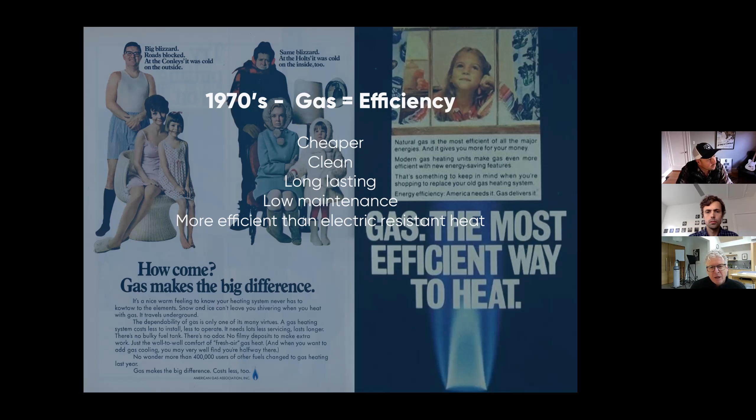So this idea of cheaper, clean, and this notion of the clean blue flame was part of the messaging that started in the 70s, and it's with us to this day, really. This idea of efficient, cheap gas really came on in the 70s, and that idea is still prevalent. In the 90s, we started to get more focused on the efficiency of the appliances. There were things going on in the regulation space, and Energy Star came on to make it really obvious to people which appliances were more efficient than others, so consumers could make good decisions that would affect their cost of operations. And so this idea of really high efficiency appliances was the way to be a good environmentalist and also to save yourself money.

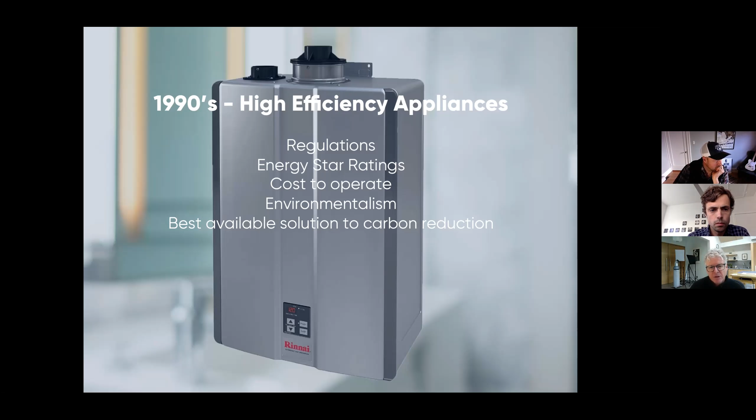This example here of a tankless gas on-demand water heater is kind of the poster child for efficiency. In a lot of people's minds, that's still the benchmark. What we're going to talk about today is how there are new developments that blow this away in terms of efficiency, cost of operations, and carbon emissions. The reason these changes have happened has to do with two really big things in the last 20 years. The first is that electric appliances have gotten dramatically more efficient. When I say dramatic, we're talking about 3 to as much as 10 times more efficient than the appliances we'd been used to.

The LED light bulb is kind of the poster child for this; it's over 10 times more efficient than an incandescent bulb because it doesn't waste energy in heat. While we're mostly going to be talking about HVAC and water heating, which absorb way more energy than lighting, lighting went through this dramatic transformation and many other things did as well. At the same time, the electric grid is getting way cleaner, because coal-fired energy generation has diminished. A lot of coal plants are being retired. In fact, just last week, we got news that Boardman closed here in Oregon, which is fantastic.

We should have a party to celebrate. That means there's no coal-fired generation in Oregon any longer. They retired that plant ahead of schedule in order to meet their promises on cleaning up the grid. And this is happening all over the country.

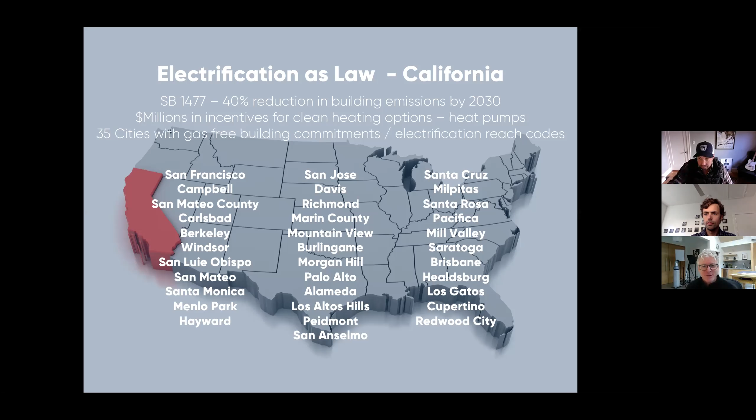But the other interesting thing, more from a grassroots level, from the ground up, there's now 35 cities that have all enacted some form of a gas-free building commitment for new construction, or an electrification reach code, which is basically promoting the idea of building all electric new construction and making it almost impossible to build new construction with natural gas as the primary power source for heat. This is happening really fast. When we started this presentation, I think it was 34 cities, and it's now 35. Really exciting.

In Washington, there's similar things going on. There's two really important pieces of legislation that were passed in the last year that establish energy performance standards for commercial buildings. They require more stringent requirements for either the envelope to be more heavily insulated, or the appliances to be more high efficiency in terms of their point system. And they're really providing incentives for lower energy use and urging people to get off of natural gas.

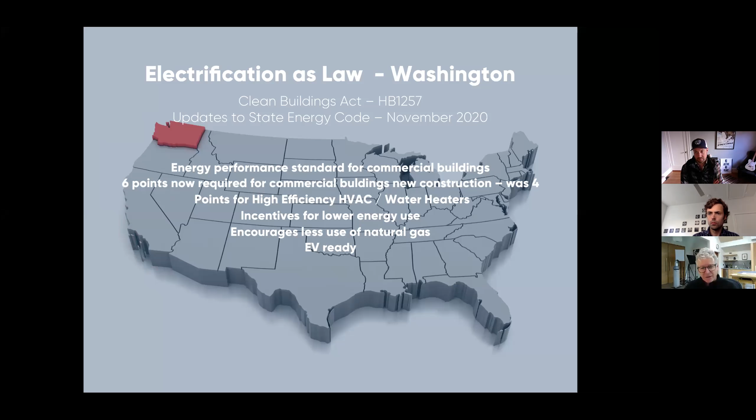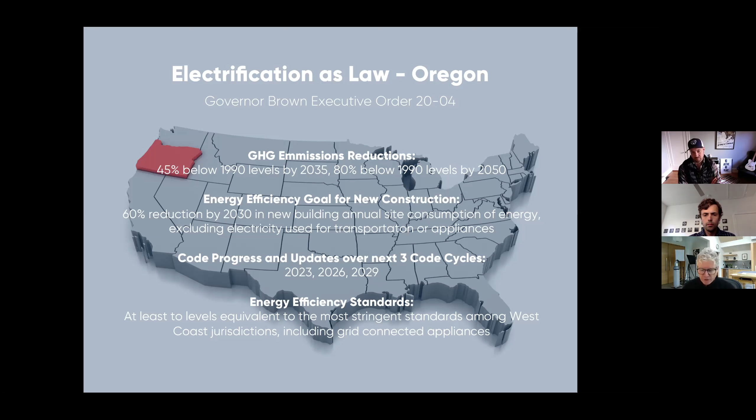In Oregon, there's some really exciting things that have yet to take shape, but with the executive order from Governor Brown, she set these dramatic levels for overall carbon reduction, 45% by 2035 and 80% by 2050. But she also called out some specific energy efficiency goals for new buildings, a 60% reduction by 2030. And basically, if you imagine how you're going to get a 60% reduction, there's almost no way to do it without some of these technologies that we're going to be talking about today. And the code that's underway now will go through 3 code cycles over the next 10 years that will reinforce those goals.

So that's kind of the background in terms of the trends in energy and the legislation that's pushing everything towards all electric homes. But there's also other really good reasons to do that have nothing to do with legislation.

Exactly. And we gave this presentation at HBA last week, Home Builders Alliance, at their Build Right conference. In front of a builders crowd, we were saying that going all electric gets you ahead of the curve. We see this legislation that's in the pipeline or already here, encouraging or mandating all electric homes and buildings. So getting ahead of the curve as a builder is a great idea. Even as a homeowner it's a great idea, because as we see in California, this can happen quickly. But in this section of the presentation, we want to profile some of the great reasons to go electric beyond the mandating and the overall trends.

So the first one is sustainability, and we've talked a little bit about that. It's the lowest cost method for building decarbonization. There are studies out there, and there's a whole buffet of choices we can make to decarbonize our buildings and our lives, and electrification is proven to be the lowest cost and most readily available solution to decarbonizing buildings. The reason for that is that space and water heating are some of our largest carbon emissions from the average home. And you're going to get a 50% reduction by going to some of this efficient electrification.

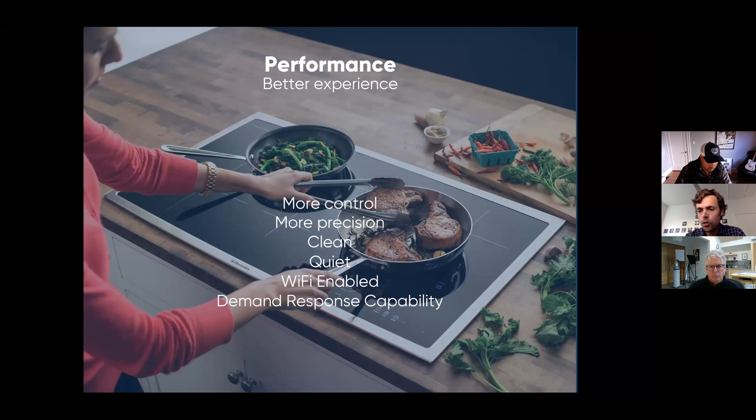And then our final benefit to an all-electric home that we want to highlight is a couple points on cost. First of all, there's cost of installation. Usually, we're finding the sticker prices for all-electric technologies that we'll profile in just a second are a little bit higher than some of their gas and old electric counterparts. But those prices are coming down, which is amazing.

We're seeing some heat pump water heaters that, with installation costs included, are lower than the average gas water heater. We're seeing induction stoves come in for under $1,000, so that's exciting. But usually, on average, the sticker price is higher. But when you consider the cost for building gas infrastructure, piping it to your house, putting the gas infrastructure in your house, studies say that a builder usually saves about $6,400 by not putting in that gas infrastructure. So there's less cost on just installation.

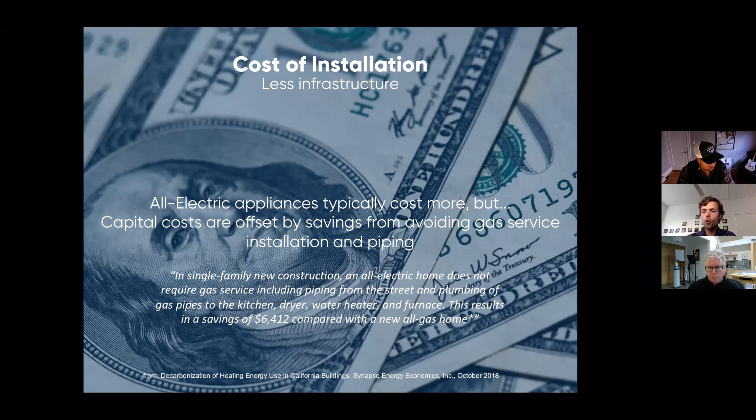And then there's also, of course, less cost on operation. These heat pumps, as we'll profile in a second, are 3 to 5 times more efficient than gas and old electric resistance. And so you're going to save a really good amount of money. We'll show you exactly what that looks like.

And then one other savings is that when you're not connected to the gas line, you save on the gas connection fee. This is a huge moneymaker for gas companies, just having all the people connected to their systems and charging that fee. That's usually $12 to $13 a month. So it's a couple $100 a year, but that can be really valuable for all of us, including those with lower incomes. So lots of potential for savings from being all electric.

Joyce, I noticed there's a question in the chat here about the cost effects of going all electric on low income communities. And it's a good question. We won't go deep on it here, but a couple things. One, there's some really interesting things going on around rate class differentiation, so that we don't get in a situation where more affluent people electrify and leave behind low income communities to get higher and higher gas bills. So there's work going on around that in Oregon, which is really exciting.

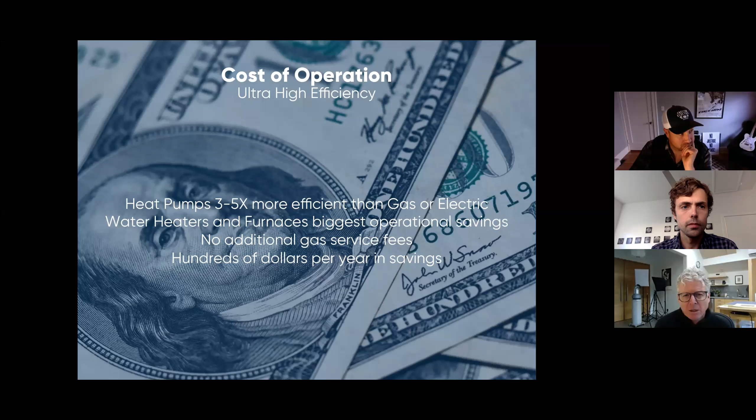But also, I think it's a good point that these are capital intensive changes. Once you get on the other side of them, as Joe pointed out, there's a lot of operational savings to be had, but those are difficult transitions for people who have lower access to capital. Low income communities are a good example of that. And it's why we need good incentives and good policy to make this happen for everybody. We're not going to talk a lot about that today, but we are going to touch on that more deeply in a webinar that we're doing next week.

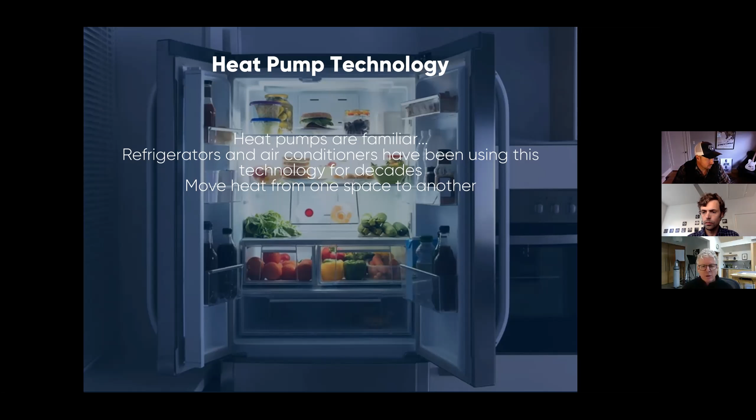And so let's talk first about water heaters, because when I retired from Nike a few years ago and decided to go into this, I was a sustainability professional, that was my job, and I didn't even know that these things existed. And they've been around for over 10 years, but in the last probably 5 years they've really started to become readily available and more of a thing, in terms of who's making them, how available they are, and how well they're working.

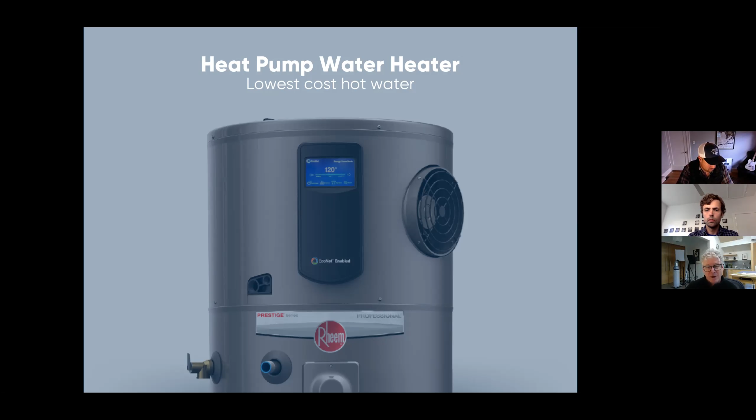So let's talk about how they work. Basically, they're a tank like any other. They're roughly the same size, but what they have on top is this evaporator and compressor unit. That's the heat pump part. And then below it, there's a tank that holds the water with a coil around it, just like any other tank, where that coil is heating the water inside the receptacle.

So what the heat pump is doing is it's blowing air across these coils inside that top area, and it's essentially sucking the heat out of that air and concentrating it into what's called the refrigerant, that fluid that is in the pipes that goes down around the water chamber. So the space that this is in gets slightly cooler, and it concentrates that heat into the tank.

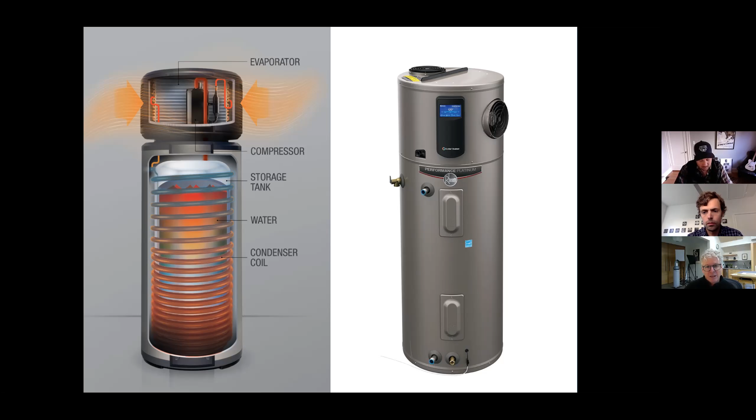And they're incredibly efficient. A good way of thinking about efficiency is in terms of the cost it takes to operate them. So we've done this calculation to show how many hot showers you can get for $10 worth of fuel with these 4 different technologies. And we're talking about a 10-minute shower here. For some of you that may seem crazy, but if any of you have teenagers, you'll know that 10 minutes is nothing for a hot shower.

So we'll say for an electric resistance hot water heater, you're going to get three hot showers for $10 worth of electricity. Natural gas is better. I mean, if you have a typical gas-fired water tank, you're getting 5 to maybe 6 if you've got a really high efficiency one. Tankless is slightly better. You'll get more like 6 or 7 for $10, but a heat pump blows these away. You're going to get 10 or maybe more with electric heat pump because they're so energy efficient.

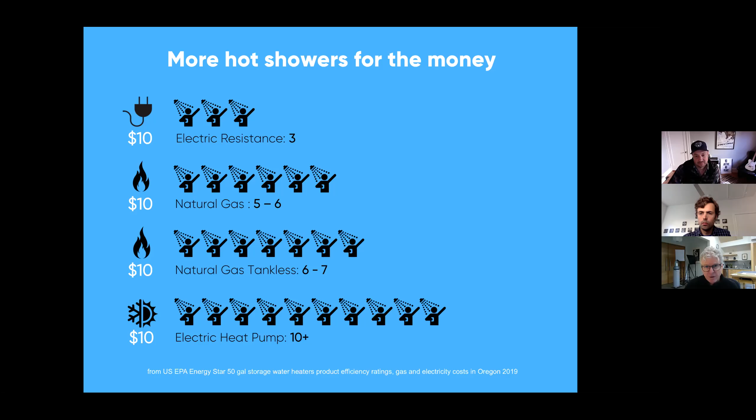What we've got is the best case electric resistance, which I would highly recommend you don't do, which is going to cost you over $400 a year to operate. A typical gas one will be more like $200 to $300. And then if you get a really efficient gas water heater, which almost nobody is doing because they're insanely expensive, that'll lower your cost to about $200. The tankless that we mentioned are also expensive, but not as bad. They're getting lower cost. They're not outrageous. That will be quite a bit lower, about $190.

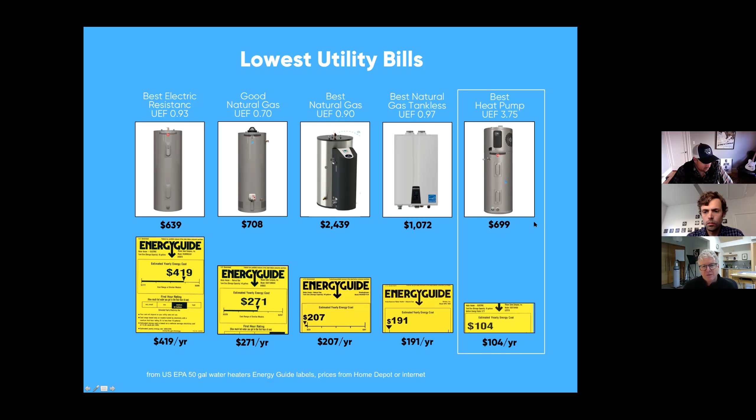But again, if you go for the best heat pump that's available, or even a good heat pump, you're going to be in the low hundreds for operating costs. And the price on these has come down dramatically so that they're starting to be one of the cheaper options that are even available, partly due to incentives and partly due to just more of them being sold.

If you look at the carbon emissions from these 5 different options, however, the heat pump blows the competition away. I mean, it's a fraction of even the best natural gas solution. And as Joe mentioned earlier, if you sign up for renewable energy from your utility, or if you have solar on your roof, this can go to 0 carbon emissions, which you will never be able to do with anything that's gas fired.

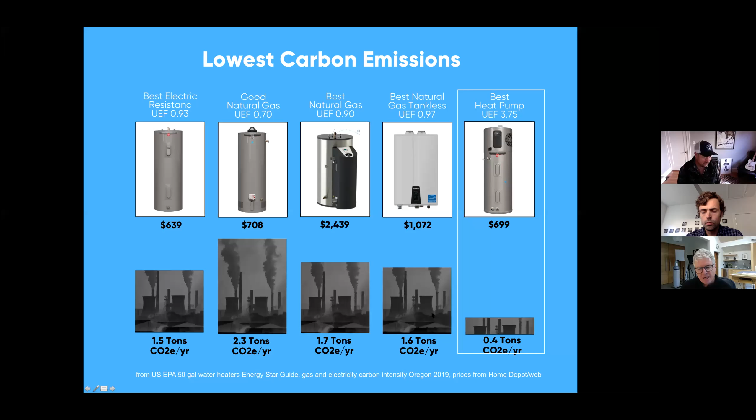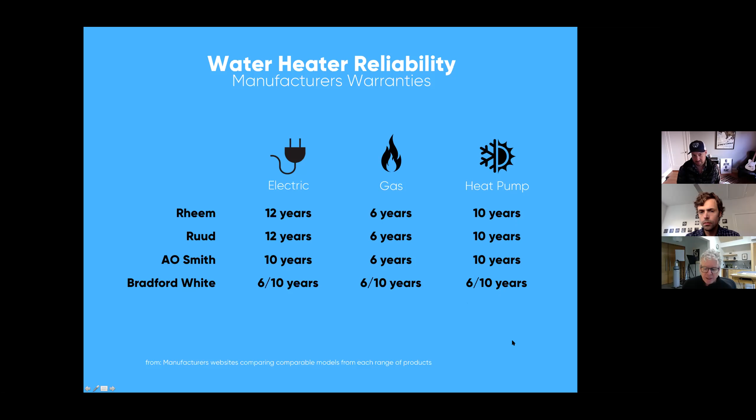So in terms of reliability, I think the best information we have on this comes from the manufacturers themselves, and it's reflected in the warranties that they give, which gives you an idea of the confidence they have in the technology. The electric resistance technology is the simplest technology. It's been around for decades and decades, and so the warranties tend to be longest there. Gas is also pretty simple technology, but you'll see about half the amount of time that the manufacturer will give you for a warranty, and heat pumps are in between, longer than gas, but a little shorter than the electric one. So I think this is a good reflection on the confidence that the manufacturers have in the reliability of the technology.

It's important to know that there are some things you need to know when you install these in terms of where they can go. They are best in an unconditioned space because they're cooling the space. So you don't want it in your living room or something like that, obviously, because it's going to cool down your living room. If you have a utility room that's large enough, if it's over about 700 cubic feet of space, that will work. Garages are perfect. We have ours in our basement, which is fantastic. It dehumidifies the space, so it dries out your basement if you've got a slightly damp basement.

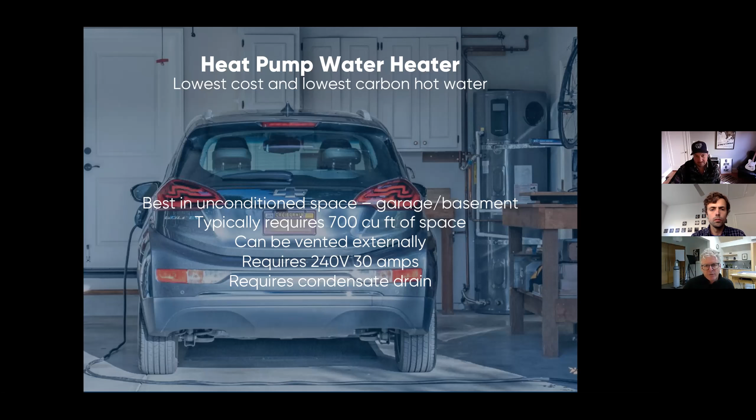It does require 240 volts and 30 amps of current. So in some cases, it means rewiring or putting in a new circuit. And it needs a condensate drain. None of these things are outrageous, but they just are things you need to know if you're putting them into your home. So it's definitely the highest efficiency, lowest cost option, lowest carbon emissions by far.

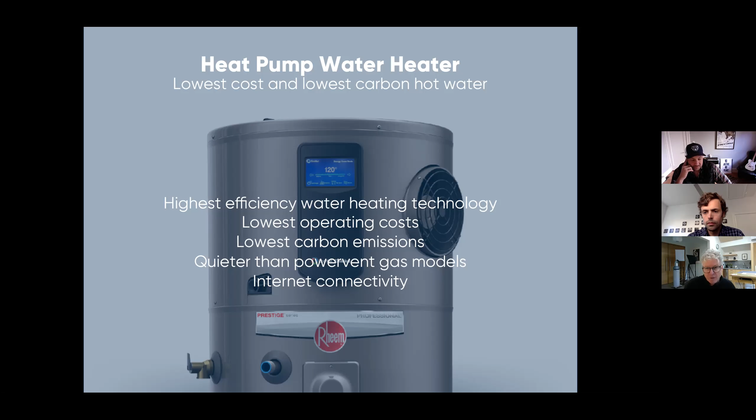They're quiet. They're much quieter. We replaced our power vent gas model with the heat pump, and it's definitely quieter than that. And the internet connectivity is really handy if you're coming and going or want to adjust it while you're away from home.

Okay, let's transition to furnaces and air conditioners. It's the same technology, but here it's applied to keeping your house warm or cooling it. There's a couple different versions of them, and Josh at the end is going to talk about a third option, but basically they all have some form of outside condenser and evaporator unit. It's basically the equivalent to what we just talked about that was on top of the water heater. In this case, it's outside.

So if it's heating your home, it's sucking the warmth from outside and putting it into that refrigerant that's translated into one of these two things on the inside of your house. Either a big thing like an air handler, which is very similar to a furnace that you would have if it was a gas or electric furnace, is connected to your ducting system in your home. And that's going to blow warm air through your home.

Or there's another option of what's called mini splits, these heads that are on the wall. You can have multiples attached to one outside condenser unit. And these do the same thing. They move air through your home. And these are the cheapest and most efficient, and they're amazing. I don't know if you can see them here. I've got one in my studio right up there on the back wall. They're fantastic.

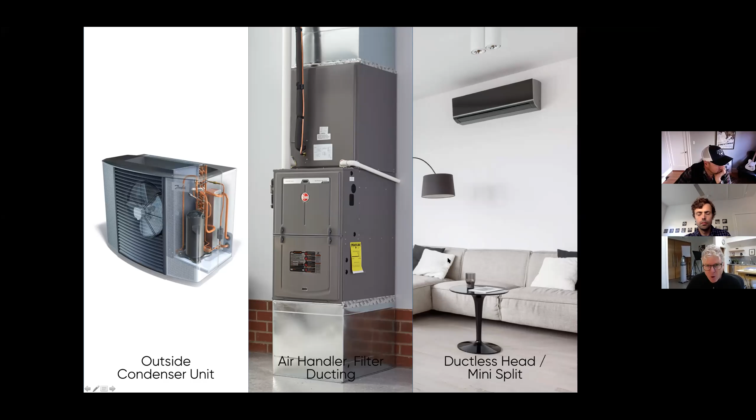Yeah, so all of these options work basically the same way. It depends on how your home is set up. This information comes from NEEA, Northwest Energy Efficiency Alliance, and it's about the cost per 100,000 BTUs of useful heat. And we use the word useful, and it's really important here because we're talking about what you feel. And so you can see electric resistance is, again, the worst option.

If you think here about baseboard heating, any of you who have experienced that know that if you're sitting right next to the baseboard or standing there, you'll feel the heat. But if you're in the middle of the room, you might not notice it, which is why you have to crank those things in order to get your room comfortable, which is why it takes so much money to heat.

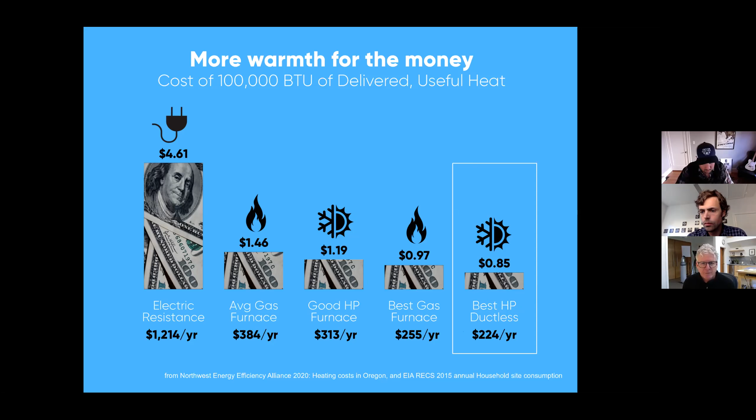Average gas furnace can be dramatically cheaper. A good heat pump is going to be cheaper than that. The very best high efficiency gas furnaces will be somewhat cheaper. And then again, ductless heat pumps are the cheapest. So the way I think of it is a good heat pump solution, whether it's ductless or ducted, is going to be at least cost equivalent to what you're going to get from gas heating.

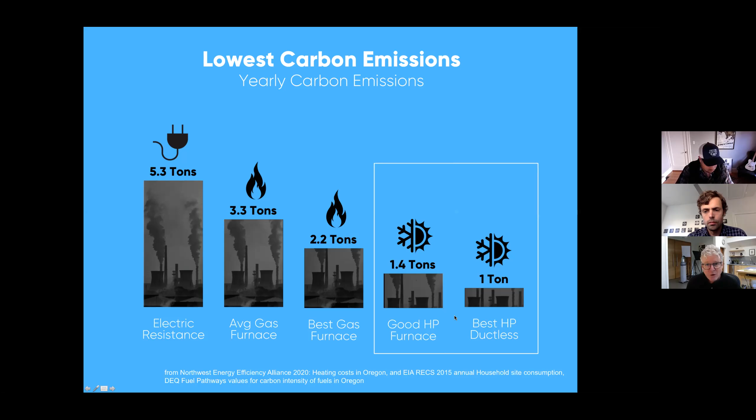But when it comes to carbon emissions, again, the heat pumps blow the competition away. You're going to be half or less what you can get from even the best gas furnaces that are out there. And again, if you fire this with renewable energy, these emissions here will go to zero, which is, again, not possible any other way.

This is some really good information from Consumer Reports. They did surveys with literally tens of thousands of their members to get feedback on their experiences with gas and with heat pump furnaces and air conditioners. And by the way, I forgot to mention, one of the things that's amazing about a heat pump is it's giving you heat, but also air conditioning with exactly the same equipment, which we'll talk a bit more about later. But that's something your furnace can't do. Your gas furnace is going to heat, and you're going to have a separate system to cool your home. So here you get it all in one system.

But the expected life, and keep in mind, this is looking backwards. Some of the systems they were getting information on are 20 years old or more. So things have gotten better since then, but nonetheless, I think this is good information about what you can expect: around 15 years of useful life. I've seen much higher than that, but I think that's a good number to think of. A little bit less than a gas system, but competitive, and roughly the same in terms of when you might need to repair it, and roughly the same amount of money that you might need to spend in order to repair it. The warranties are very similar in terms of their duration.

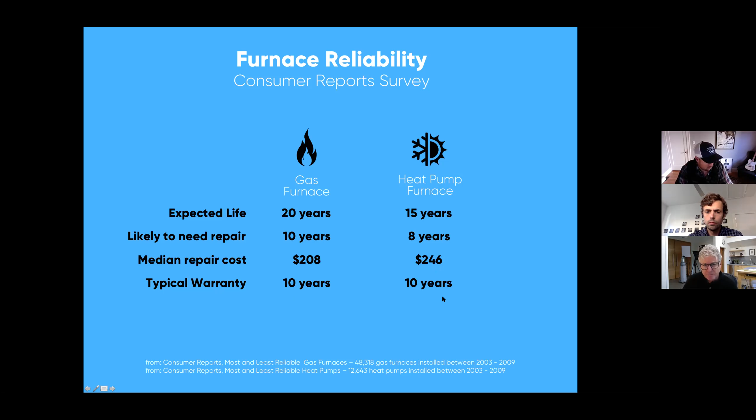So it's heating and cooling with one system, which is fantastic. And here, as our summers get warmer and indoor air quality is more of a problem, you can't open your windows to cool it. That's a really nice feature to have. You can get ducted or ductless, like we mentioned. There's a variety of levels of efficiency and sophistication of these systems, from single stage to ones that have different levels of operation or variable capacity, which again can give you more comfort.

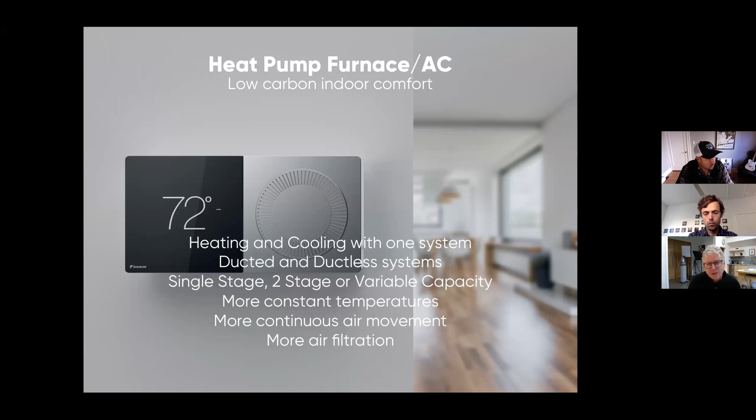One of the things that's fantastic about heat pumps is that they tend to work with more air moving through the house, because instead of firing up this giant, really high temperature gas furnace and then turning it on and off, you're basically operating a lower temperature heat for more prolonged durations. And so it relies on more air movement, which means better filtration. And that's something you can notice in a home that has one of these.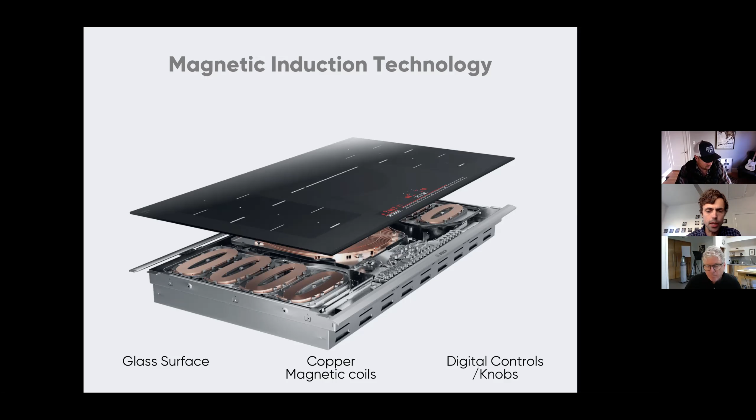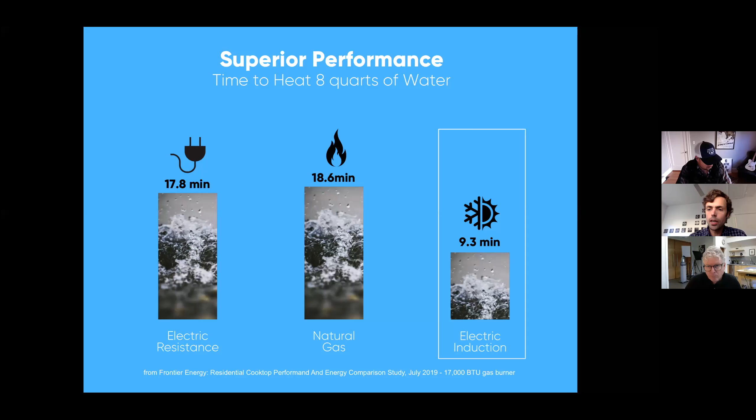Let's see some of the other benefits of the induction technology. Of course, this performance is incredible. It's half the time to heat water as gas and electric. So you have to get used to how fast induction is because it's heating the pan or pot directly. And similar to that, it's half the time to heat and a third or half the time to cool down because again, you're not heating the space underneath.

So there's less heat all around, and that's great for safety. I've got 2 toddlers, and that's really important. And it's also great just for cooking precision. You can cook and cool and control your temperature really quickly with induction that is unique amongst the technologies.

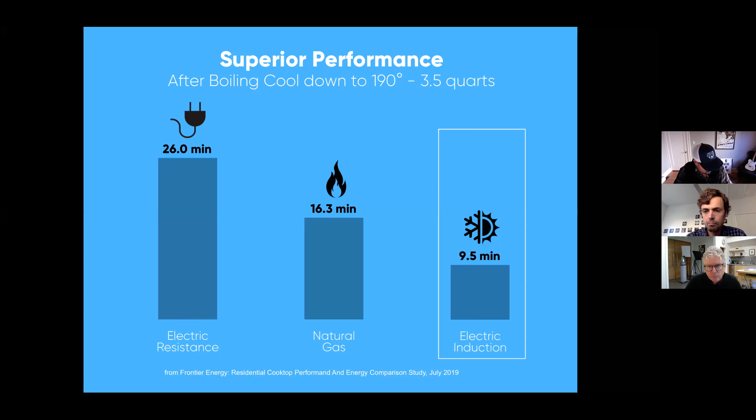And then the efficiency is another huge bonus. You're more efficient than electric and way more efficient than gas. Now, cooking doesn't account for a ton of energy in the average home, but it's nice to know that when you're cooking, it'll be more efficient on induction.

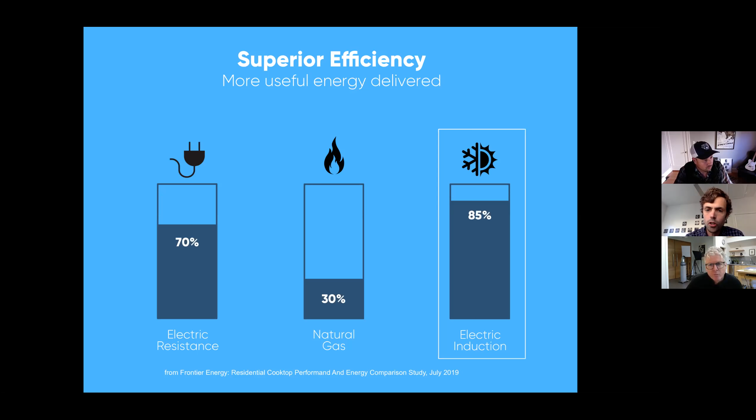Let's see here. One thing we talked about earlier was the air quality with induction. And we just really want to highlight that in an all electric kitchen, especially with an induction stove, you don't have any of the carbon monoxide or nitrogen dioxide emissions. And studies are linking the gas in a stove to higher rates of asthma in children.

And some of this indoor air pollution that they study with gas stoves that aren't vented, and again, venting is not required in the United States, it would be illegal outdoors, so we're talking huge emissions of poisonous gases. So another reason to go all electric in the kitchen that we should all highlight.

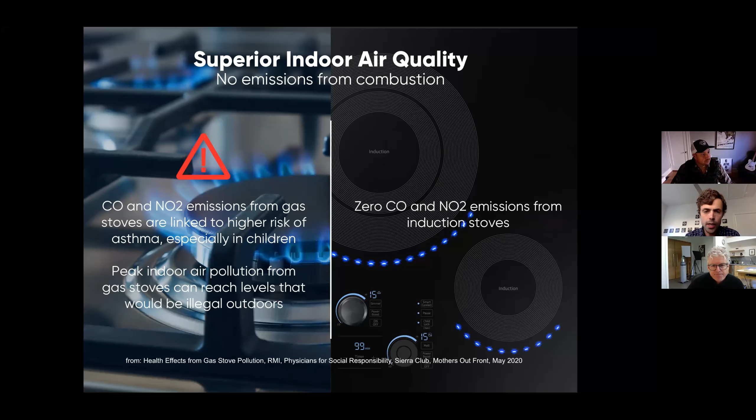Go ahead, next slide. So just a little recap on induction. You got that precise temperature control. You can get the heat high or low, and you get instantaneous control. It's faster heating, faster cooling. It's safer for children.

One last thing I'll say on the safety. If you don't have a pan on an induction cooktop, it won't turn on. It has to sense a pan, and otherwise it'll turn off. So for those of you who've left a burner on, like me when I had old electric, a bunch of times, that doesn't happen on induction anymore.

It's easier to clean, and then you don't get those toxic byproducts. Great. So we'll finish with the key induction technologies and soon turn it over to Josh with the electric fireplace. This is something that I think a lot of people haven't seen or maybe are skeptical of. I know I was. Brian and I went out to this all-electric home in Hillsborough from a builder called Ichijo, and I was pretty much blown away by the electric fireplace insert.

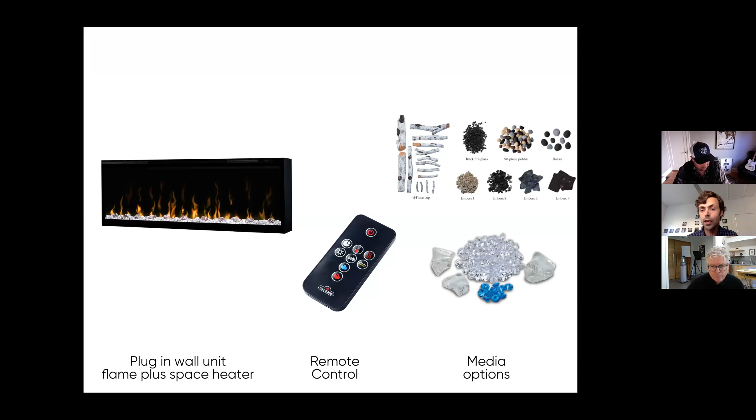Let's just talk briefly about it. It plugs into a wall. You can kind of see the image there. It can have heating mode, so like a space heater, or you can just look at the flames in the summer, which is nice. There's tons of media options, so you can control the little stones that are in there, and also the flame color. There's just a lot of flexibility and control, and it's a builder's dream. It can go anywhere. You don't need the outdoor venting.

And we feel like these fireplaces are so good that you kind of have to see it to believe it. So we just did a little quick video of how great these things look. Cue the romantic music. Yeah, you can all imagine.

So hopefully, I was really blown away by how impressed I was. They are almost too good to believe. I mean, you almost have to see it to really believe it. It's crazy. And Brian was always talking about how great his was. And I was like, yeah, yeah. And then when I saw one, I was like, whoa.

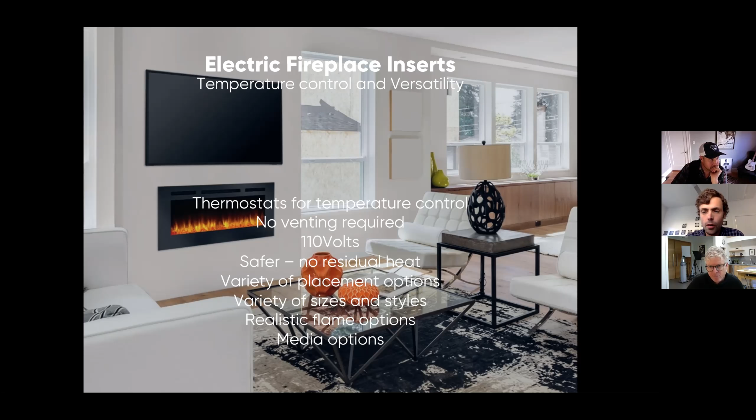So check them out. Again, you've got thermostats, that exact precision and temperature control, 110 volts. They're safer, no residual heat. And then you got the styles and the sizes, the colors, and the different flames are very realistic. So I'll kick it over to Brian to close us out.

And yeah, just to quickly wrap up there, because I want to get on to Josh, those are the technologies we've talked about: highest efficiency, lowest carbon available. Even if they seem a little bit unusual or new to you, I think it's confidence building to know that the same people that are making the stuff we've all grown up with, the gas furnaces, et cetera, are making the heat pump versions, and they all see the writing on the wall. They're all transitioning this way. That's where the R&D is going. Induction, heat pumps, et cetera. So all the trusted names are in this.

The trusted installers are also doing this work. We would say, though, that there are some installers who are more familiar with this technology, and it's best going with them. In fact, I've experienced people who will try to talk you out of it because they just like to keep doing what they've been doing for years.

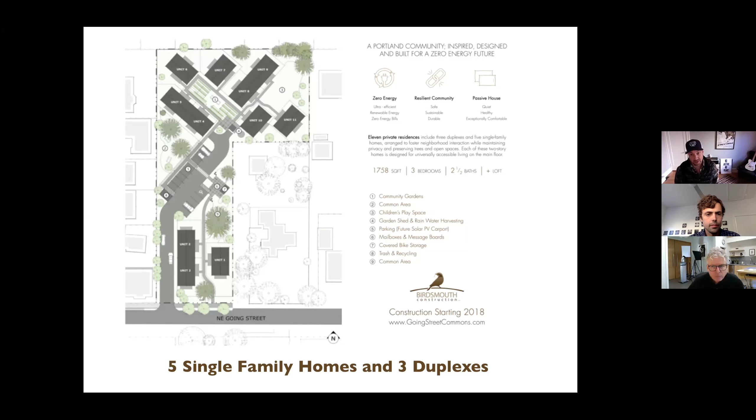So this is an overview of the site, kind of an L-shaped site. You can see there's 5 single-family homes and 3 duplexes. Each unit is 1,758 square feet, 3-bedroom, 2.5 bath, plus a loft that can be easily converted into another bedroom.

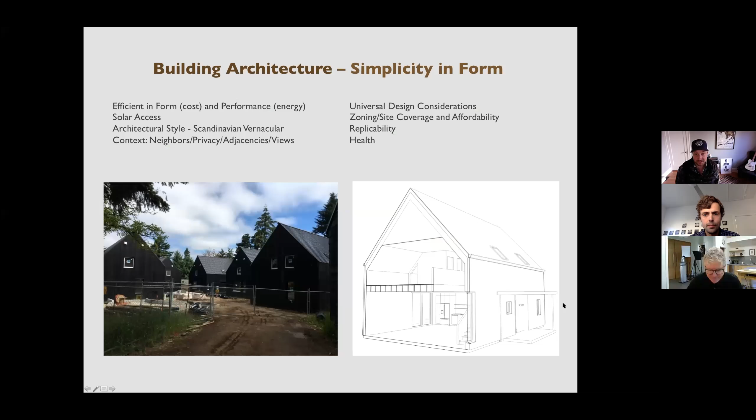So we're just starting with the building architecture. We wanted to keep it simple. It's the old acronym, keep it simple, stupid. So we wanted to keep that form very simple so that it was easy to build, easy to insulate, easy to air seal, all those things, and also very performant. It had really great performance because of that. It also kept the cost down.

When we were laying out these houses on the site, we were very much looking at the solar access for every one of these homes, and also where we want to have things like the community gardens and the solar PV covered car parking. This is similar to a child's drawing of a house, right? It's really simple, but we wanted to make that also attractive.

So to solve that problem, we turned to the Scandinavian vernacular, lots of examples of homes up there that are really pretty modern things that are quite simple. So we dovetailed those two things together in terms of the form of the buildings. They're also aging in place. There's no thresholds. There's the master bathroom and bedroom on the first floor, along with laundry on the first floor.

We went with the planned development kind of condo thing because we were able to get more units on the site this way, which therefore was able to drive the cost down too. With some of the new zoning happening here in Portland with the residential infill project, we're going to be able to do even more than that, which will drive costs down too for these types of buildings. We wanted to make them replicable so that we could draw one floor plan and then replicate it throughout this project, and also focus on high indoor air quality.

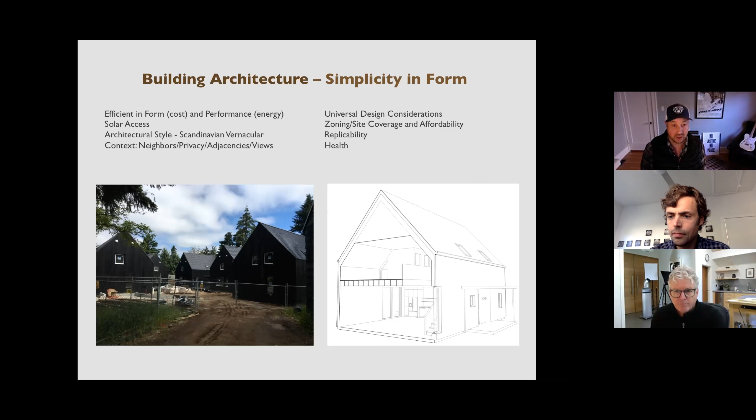So the other thing we did is we have a high performance envelope. I know that's not the main thrust of this presentation, but it's also a critical component, making sure that you have these efficient systems that you keep that energy, be it heating or cooling or fresh air, inside that envelope of your building. So these are continuously insulated, they're airtight, they have triple pane windows, and they have fresh air systems with heat recovery that are designed into them.

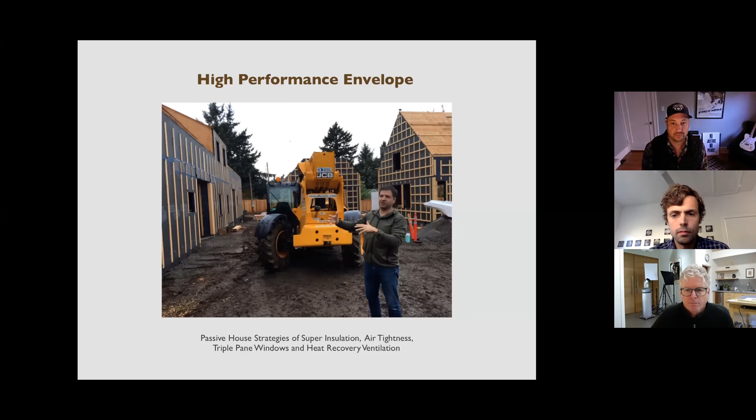Part of the idea here too was to let the landscape be a part of the entire project. The homes are really meant to be the backdrop for the landscape. So being able to keep things simple and kind of plain looking, I suppose, to let the landscape, once that grows in, really be the shining star here. We were able to keep all the existing trees on site, which really played into where to site the solar PV array and stuff like that. We did a lot of solar studies to figure out where the most photons were landing on this lot.

We wanted to create habitat. We wanted to conserve water, so a lot of the plants were chosen specifically so that they don't use a lot of water. Edible plants, community building, again with the community gardens here, attracting pollinators, and beauty. If we're going to make homes that are quality homes, they're going to last a long time, they have to be pretty, otherwise they're going to get torn down.

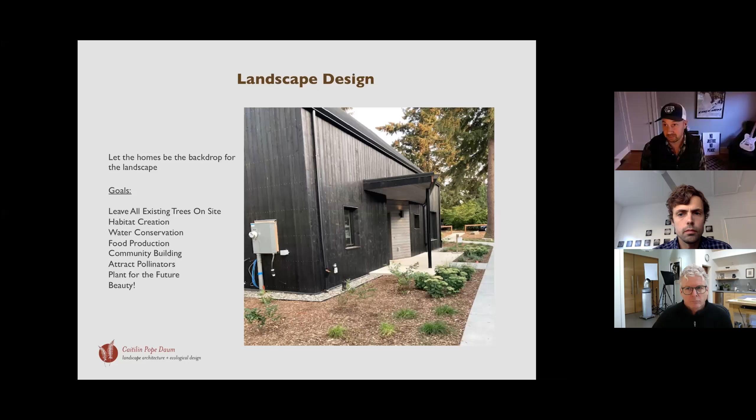Some of the amenities with these homes, again, these are quality buildings. Nothing here is being compromised by going all electric. In fact, I'd argue the opposite. These have private yards. There's open space that can be shared, garden beds. You get the solar PV with electric car chargers built in. There's rainwater storage that waters all the gardens on site. There's covered bike storage, community play areas. There's fire pits. We got recycling areas that are very thoughtful and deliberate throughout this whole thing to make it easy to recycle, and off-street parking.

So in terms of the all-electric design, here on the left you can see this project. It's currently being built right now by our friends over at Greenhammer. It's going to be complete probably end of January this year, so in about 2.5 months' time. This was a photo I took a couple of weeks back, and we're just starting to see the posts go in that'll hold the electric solar PV car port there.

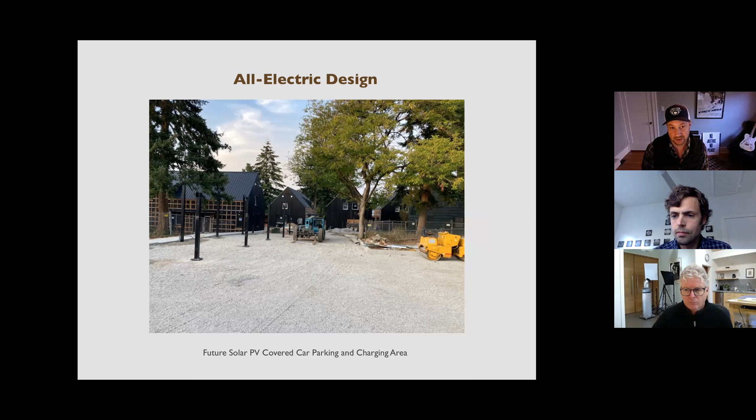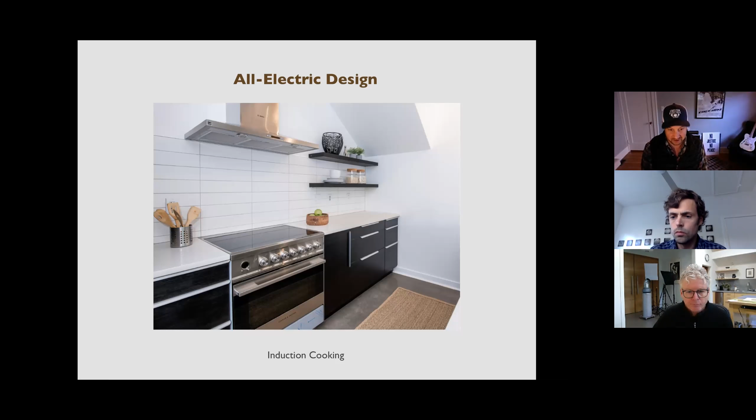And they all have induction ranges inside the homes. Here we're seeing just a picture of that. I also recently switched to induction at my house, and I really enjoy it. I don't feel like I'm missing anything. Again, there's a great webinar that was posted in the chat box that Electrify Now did with the chef cooking on it in real time, and it's a great thing to check out if you're interested in induction cooking. All the homes have induction cooking.

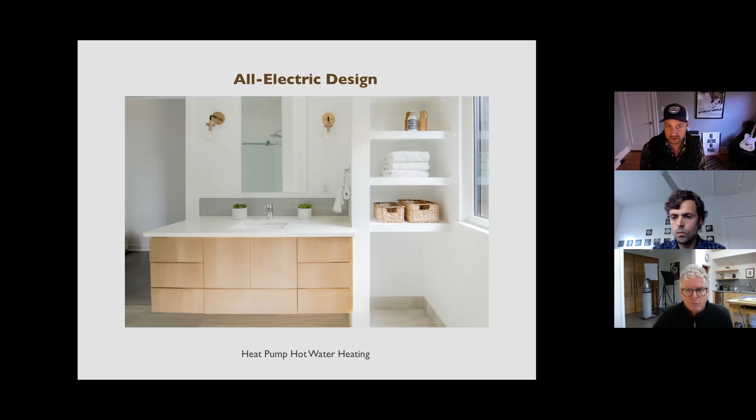Other things, it does have a heat pump hot water heating system. So it's one of those systems that Brian was showing earlier with the combination, got the heat pump on top of the unit and then the tank below it. So that's how we're dealing with the hot water. We're getting about 225% efficiency on those hot water heaters there.

And in terms of the space heating and cooling, along with the fresh air, we're using a unique system called Minotair. It's one of these magic box systems that does all of this in one unit. So it does the heating and cooling with the heat pump. It does not have an exterior unit, so it's just one thing that goes on the inside of the house. It's relatively small, about 36 inches long, about 14 inches high, maybe 2 feet deep.

And it also has the heat recovery ventilator inside of it, all in the same box. So we can bring the fresh air into the house and filter it with a MERV 15 filter, which takes out particles much smaller than smoke dust, which was a problem recently here on the West Coast, and still is. So the great thing about this unit is that it's really small, so we can locate it anywhere within our conditioned space.

It's extremely efficient because it's using one motor to power not only the heat pump, but also the HRV. So you're getting these levers that are really knocking up that efficiency. And we only had to install one of these units in one set of ducting, which means that we were able to save roughly $15,000 per house by not installing a completely separate system. And when you're building 11 houses, do the math, that adds up pretty quickly.

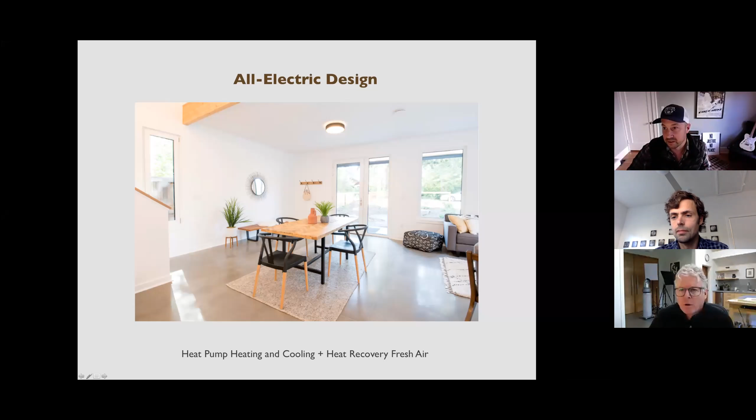Hey, Josh, so is this system, you said that there were some ducts. It's a ducted system? It is a ducted system, correct, yeah. So it's got an intake from the sidewall of the house, and it's got an exhaust up on the roof. And then it runs the conditioned and filtered air to all the different locations in the house. If you look to the right of the light on the ceiling there, you can see one of the diffusers in the living room. So it is a ducted system. Okay. Cool.

We did a lot of energy modeling with this project. So we were able to orient the exact windows, the heights and widths of the windows, so that we can get really great daylighting in these buildings. So that they're not pointing directly south and you get a lot of glare. They're also not just on the north side where it's really dark. So these buildings, even without the additional LED lighting, just on their own accord are very bright on the inside. That was very deliberate. And then with the rest of the lighting that we have, the active lighting, it's all LED lighting in there.

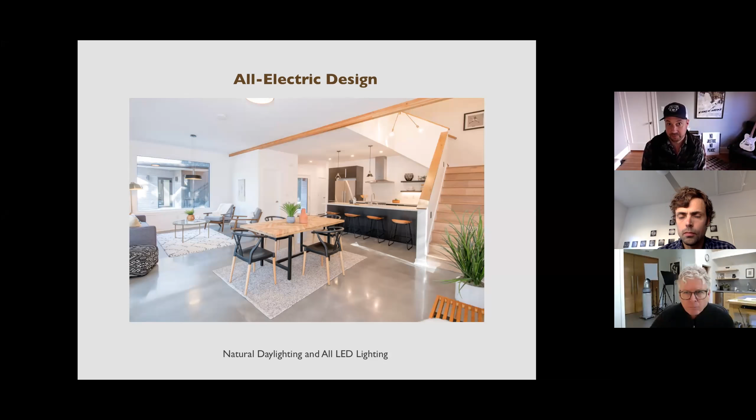And I'll read through this. How are these homes different than a code level home or a home with natural gas or otherwise? The code's a minimum standard. Anything less would be the worst house you can legally build. These houses are extremely quiet. The walls are 12 to 14 inches thick. They're airtight. The Minotair heating and cooling system is extremely quiet. You really can't hear it. Same with the hot water heater. It's very quiet.

Really, the entire volume of air is exchanged once every 3 hours in this building, and it's continuously filtered through a 15 micron filter. So you're always getting high levels of oxygen. Carbon dioxide levels don't spike. You really feel good living in these homes. They're very comfortable. There's no hot or cold spots anywhere in this house. There's no drafts. It's got a consistent indoor temperature year round, no matter what the weather is. That's due to the envelope. It's also due to these systems and the all electric systems in here. I talked about the natural light. The windows are intentionally sized and positioned, no glare, no dark dreary areas.

These homes will last a long time. We're aiming for 150 years for these things. To use a counterpoint, the average lifespan of a new home in the United States is 25 years, believe it or not, for a code level home. That's prior to a major system like all the siding and windows having to be completely replaced, or there's major failures. Remarkable stat. These things are really designed to be multi-generational homes that require very little upkeep, very little elbow grease that needs to be put into these buildings.

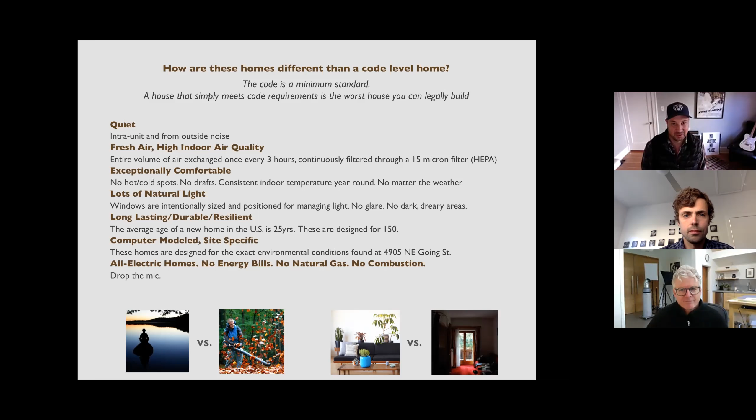That is so cool. Josh, there were a couple of questions about the name of the system for the HRV and heat pump combined. Yeah, Minotair. Sorry, say that again. M-I-N, I'll type it up here. Minotair. Boom, it's in the chat. Thank you. And you can Google that.

There's a couple of good questions, which I'm going to try to track through. We've got a few minutes left here. Someone was talking about wood fireplaces and if they're polluting. Wood fireplaces are terrible. I mean, you should not use a wood fireplace for the sake of your own health, not to mention the carbon emissions, et cetera.

Burning wood in general is highly problematic, even in the very best wood burning stoves, which have better air quality considerations. But I think if you have an indoor air monitor and a wood burning fireplace or wood burning stove, you will see how bad it is. It's not a good thing. I would highly not recommend it, and it's not good from a carbon standpoint.

There's a good article by Sam Harris, for those of you that are into him, comparing the particulates of a wood burning fireplace to a diesel car running inside your house. Also, I'll mention these homes, if you were to put a wood burning fireplace in there, it would be such a powerful heat load. You would just be opening all the windows. It's just way too much power.